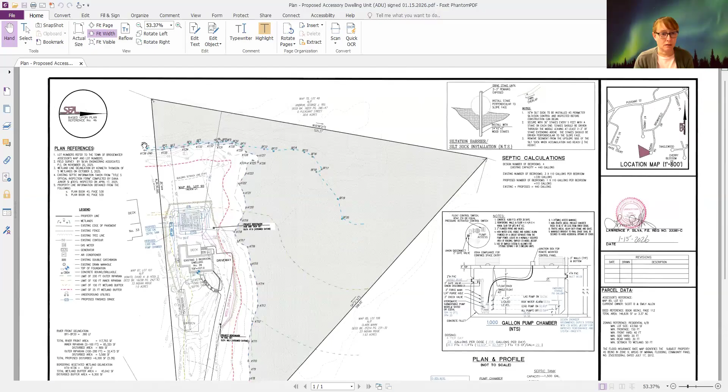This is a continued hearing. We continued so we could do the site visit and review the wetland line. I met with Marilyn and Mr. Levesque, Dan, over at 29 Indian Ridge. We parked, walked the wetland line, the bordering vegetated wetland, and walked all the way to the bank. We identified every flag along the back of the house lot, pointed out the area where the house will be located outside the 100-foot riparian, and showed where the septic would go, in a lawn area. That was most of what we talked about while there.

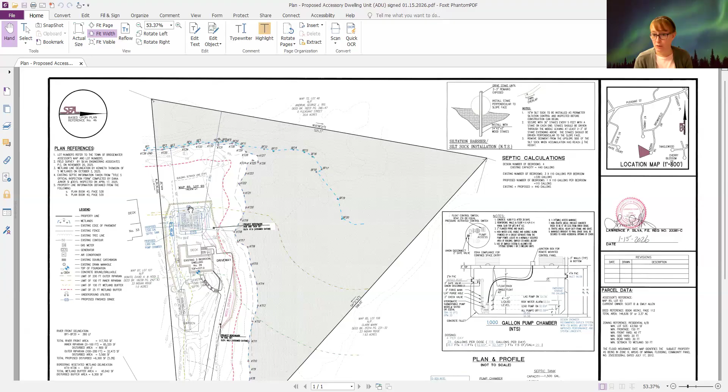I can zoom in. Thank you, Rebecca. Yes, we were out there, and this was one of my first walks with Dan, so I had no issues. All the flags were identifiable. It's well within the setback, it's not in the 25-foot. Thank you, Marilyn. I had no issues with this filing.

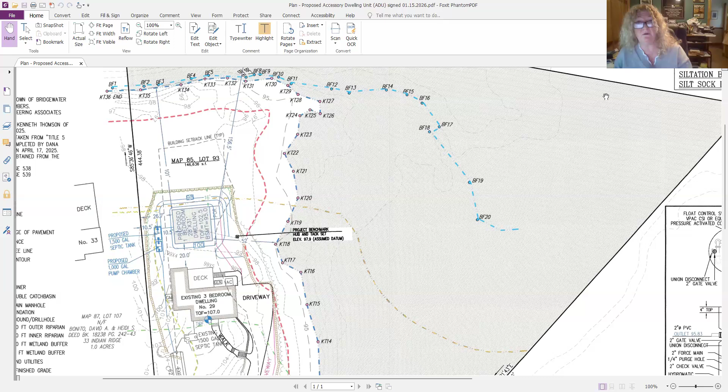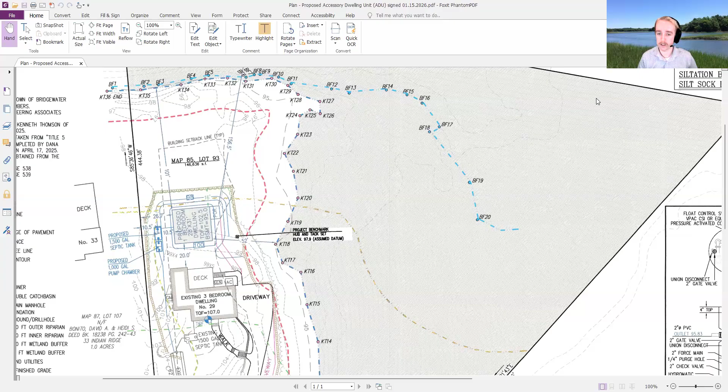Dan, would you like to weigh in on your walk out there? Yeah, I would just agree with you. We went out and were able to identify all of the flags. Everything looked great, and the area we found for the proposed site looked great, and we confirmed with the property owners that abutters have been notified and are okay with the work. There was just a slight thing in the driveway, but it's such a small driveway, it's a grass area, they drive up anyway. So again, I had completely no issues with this. I was satisfied with the line.

Bob, anything from your end on this before I hand it to the rest of the commission? I have nothing. I have nothing on any of these applications, Marilyn. Well, that will make my job easier.

Thank you. All right, let's go right down the line. Laurie? The only thing I was going to suggest is no further clearing in the 100-foot inner riparian. The house is far enough away, but I've seen people clear right up to the riverfront, and I just want to make sure that doesn't happen in this case. If you agree with me, great, if not, that's fine too. No, I think that's perfectly fair. We're going to do a little pruning on one of the trees close to the house. That's perfectly acceptable, it's within the 10. Yeah, and definitely no clearing out back. We can certainly special condition that, but everything is right up on the lawn, so I don't have an issue with that.

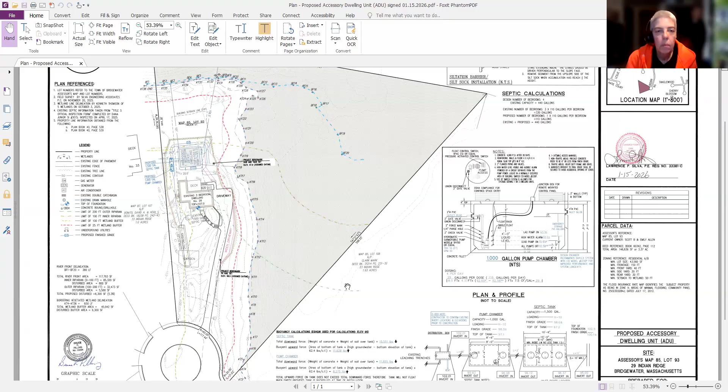I'll go to the next commissioner, Eileen please. Yeah, I'm fine with it. I agree with Laurie, though, no clearing in the back by the waterfront or on the side either. Anything further, Eileen? Nope. Okay, Deb? No, I agree with both Eileen and Laurie, and I'm good with everything else. I think we're all agreeing, no further clearing. Did I miss anybody? Eileen, Deb, Laurie, myself.

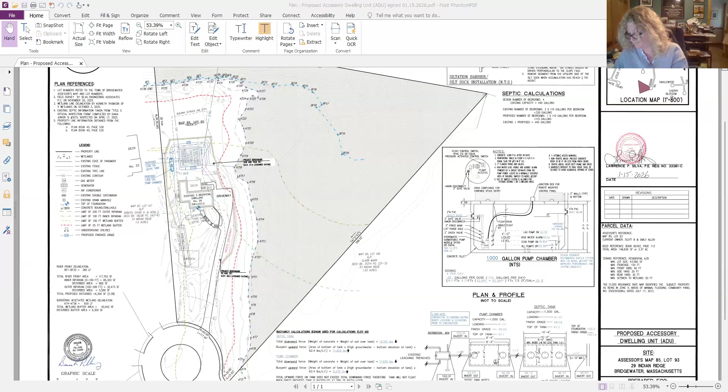All right, Dan, anything further to add before I open it up to the public? No, nothing further to add. Okay, at this time, if anybody, an abutter or anyone in the audience, would like to make a statement or has a question on the notice of intent, this is 29 Indian Ridge, map 85, lot 93. You can raise your hand via chat and Bob will let us know. If you are going to speak, please state your full name and address for the record. Let me see if there are any hands.

I am not seeing any, Madam Chair.

Okay, seeing no questions, then Chair would entertain a motion, please, to close the notice of intent hearing on 29 Indian Ridge, map 85, lot 93.

I'll make a motion. I'll second that. All right, so we have a motion by Deb, a second by Laurie. Any further discussion?

Okay, roll call vote for closure. Deb, Yes. Eileen, Aye. Laurie, Aye. And myself as an aye.

So we are officially closed on 29 Indian Ridge. Chair would at this time entertain a motion to approve 29 Indian Ridge notice of intent with special condition of no further clearing.

I'll make a motion. Okay, I'll second it. That was Laurie and second by Deb. Correct. Any further discussion?

Okay, hearing none. I think we captured it with the clearing. Roll call vote. Laurie, Aye. Eileen, Aye. Deb, Aye. And myself as an aye.

So thank you. We are officially closed and approved on 29 Indian Ridge, map 85, lot 93. Thank you very much. All right, you're welcome.

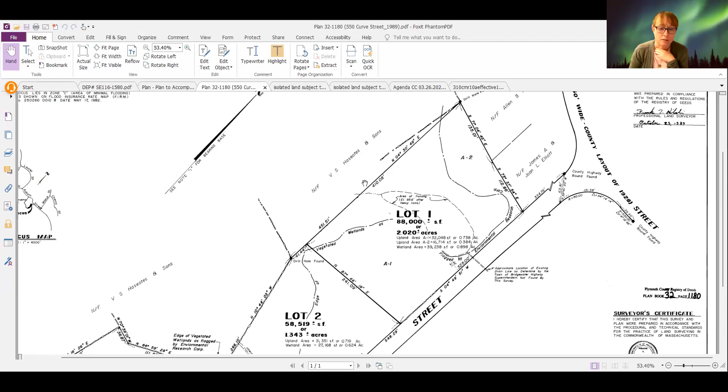And we're looking to put another house right over here on the other side of this area of ponding. Now, this is an area of ponding. You can see that street drainage does kind of flow into this area, and I have more visual aids to talk about this. So we had Ken flag the wetlands in June, I think it was June 2025.

And so we flagged - Rebecca, could you just mention Ken's full name, please? I'm sorry, Ken Thomson of 5 Wetlands flagged the botanist. He flagged the wetlands.

And we went out and located it via survey. And at the same time, when Ken was there, he noticed this ponded area and he had us take volume measurements while we were there. So we'll get into that in a little bit.

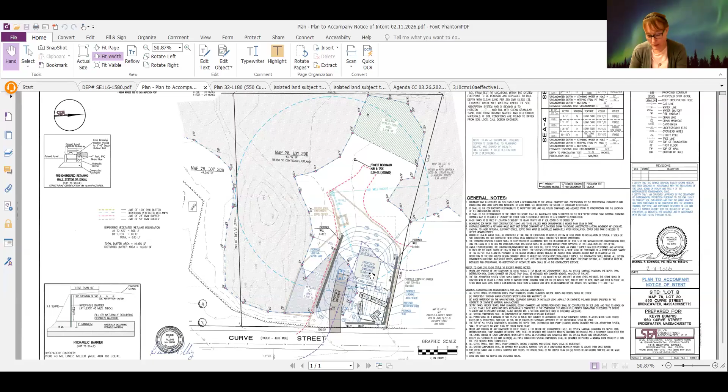So there's this wet area sitting on what would be the left side of this proposed new home. Knowing that and hoping that we can have the family stay together on the same 2-acre piece of land, we tried to estimate what would be the most logical place to squeeze in a tiny little home. It's really no bigger than some people's garages these days.

We completed some perk tests and we managed to get some soils that would be conducive to septic. And so we're coming before you with the hopes that we would be able to fill this 3,000 square foot area. The threshold is 5, so we're under the threshold allowed. This 3,000 square foot area to squeeze this tiny house in and a septic and a well so that we're not using resources from the town.

In return, we would replicate our wetlands back in this area. It's near the ditch. It's probably a more appropriate area for the wetlands anyway.

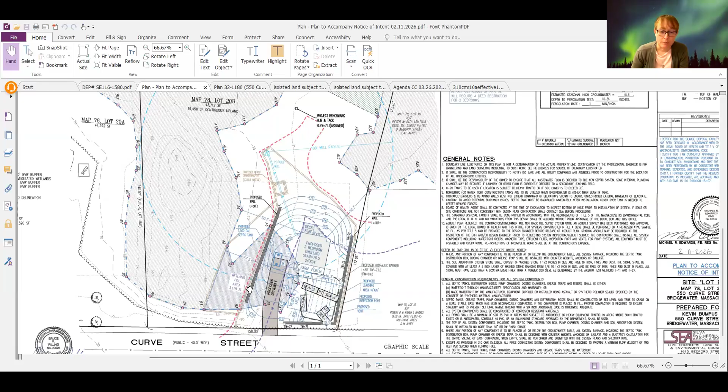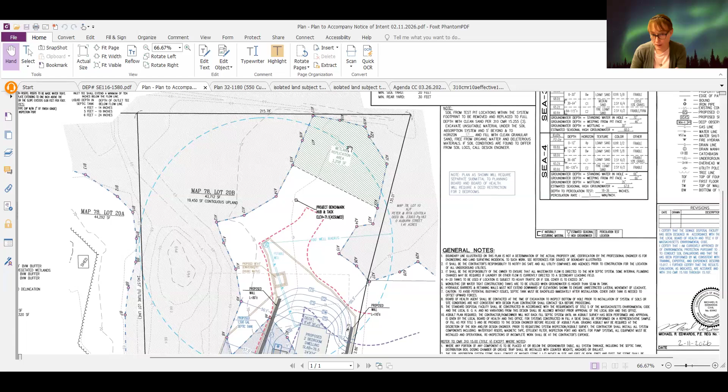When we tried to walk the site, I didn't have enough notice to have it staked, so we do need to go back. While we were there, we did observe via audio that it was a potential vernal pool. So what I'm hoping we can get out of this is to walk the site, flag the areas, do some replication and filling, and make sure it's not viable habitat. And if it is, we need to look at provisions for replicating the viable habitat in suitable areas, preferably where we're going to replicate.

As part of the stormwater, we did have erosion control. We do have a dewatering pit because of the well and everything else going on. Let me check my notes, making sure I got them all.

I'd like to hear from the commission and their thoughts on this. All right, I'm gonna fan it out quickly. I'm just trying to get Dan familiar with the area, getting him out there. It definitely needs to be staked and flagged. One of the biggest things was when we got out of the vehicle at the big pond, we could hear what we call vernal talk. Dan, I'll let you weigh in, and then I want to hear what the commissioners have to say too. Go ahead, Dan, tell us what you saw.

Sure. Upon arrival, it definitely had the vernal appearance first, and we heard what sounded like potentially chorusing wood frogs, which is indicative of a vernal pool. Of course, there are more factors that go into the true classification of a verified vernal pool. I noted just yesterday on Mass Mapper that the site does have a potential vernal pool marking in that general area, so the state's already aware of it. But I agree that getting it further staked and flagged, and then further investigated to determine the actual status of the pooling area, would be important.

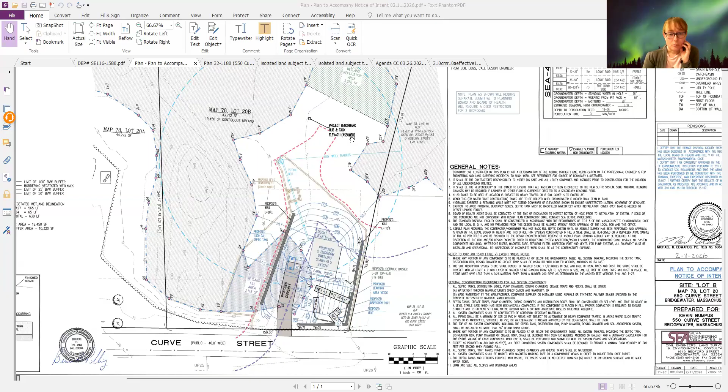Rebecca: Yeah, okay, no, it is not a 2-to-1. The area, we were kind of hoping we didn't have to—I'll be honest—because DEP only requires a 1-to-1. So we can revise this to demonstrate a 2-to-1. What I'd like to point out as well, I know I may have made it seem otherwise, but this is the area of ponding and vernal pool, and I know the habitat ventures out 100 feet. But we did do the volume calcs as required by your bylaws, which say a vernal pool holds a quarter acre-foot and all of that. Since you haven't had it, I didn't want to get into it, but I want to be able to submit it to the commission as we progress along this process.

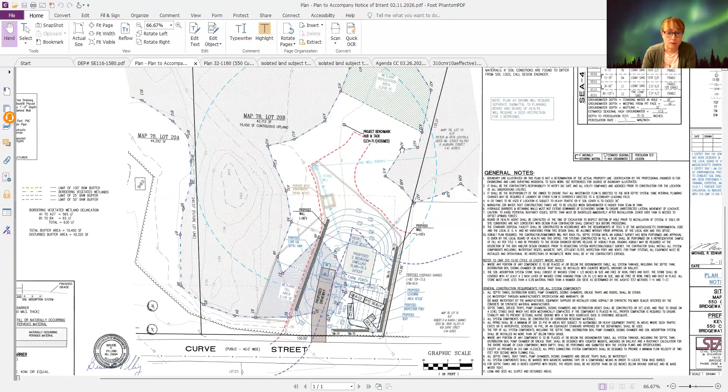It wouldn't be the vernal pool that we're disturbing, it would just be the habitat area outside of it, just for clarification. If there is viable habitat of anything important in here, which we want to investigate and look at before proceeding, we're not going to touch the actual body of water. It does have an outlet, and it actually drains to the ditches out in the back here. So the actual pond isn't all this gray area—the gray area makes it look out of control, but it's actually a lot smaller once you do the volume. So I want to submit it so you can all look at it at the same time. The 2-to-1, again, I was hoping we could still fit it and still give you your 25-foot buffer. So I'm okay if that is a condition you'd like to see.

I do want to point out that a lot of this wetland area has expanded due to inadvertent discharges from some pumps on neighbors' properties. It's really impacted how this section has been growing over time. There is a discharge coming in—just putting that out there because it affects how the wetlands will grow.

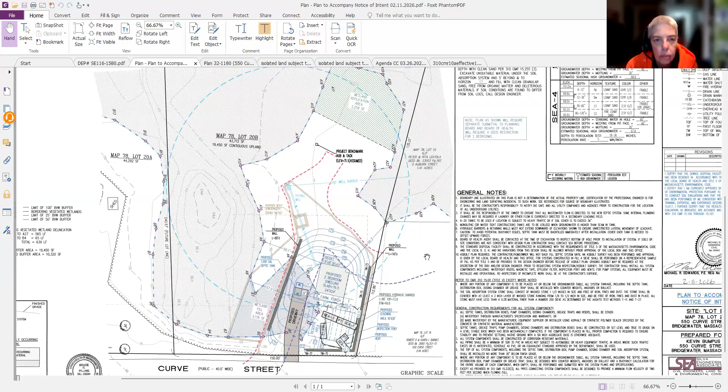Same thing, definitely want to get that certified, and definitely don't want the habitat disturbed. Other than that, I don't have much. I think it would be better at 2 to 1, but I'm not brokenhearted if it's a little smaller. The habitat's the most important part to me in the certification.

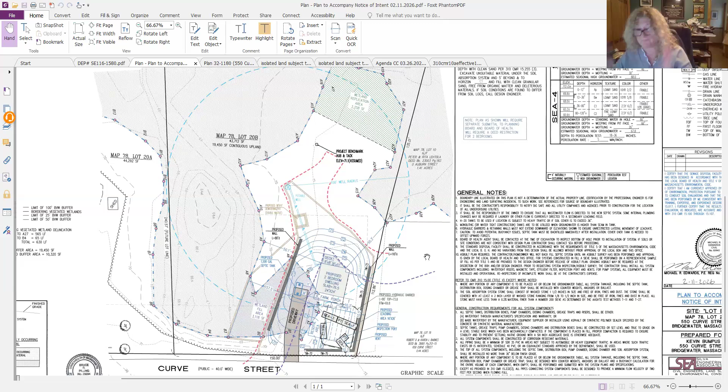I like the flexibility with doing the line at 2 to 1. Again, that vernal pool has to be done, and it's the perfect time now. We're in the season. So, thoughts on that, guys? I agree. I agree too.

All right, Eileen? Yeah, I think that you're probably going to need a third party review.

Given the size of the pool and the rest, I'll always say when I'm not comfortable making a judgment or a call like that, if I'm not comfortable, somebody else is, but I'm not comfortable.

So I think we can get it staked. Rebecca, would the applicant be in agreement to a third party review on behalf of the client? We're just looking at the vernal pool, the wetlands, we're not— Oh, I understand completely. We have no problem if we can solicit three quotes and review them before choosing.

That would be fabulous. Dan will have the list in the office. There are three approved parties. Again, we're not looking for a technical review, so they have the three they can get quotes from, and once they do, they can submit it to us. So it's for the applicant to get a price shop on that.

Perfect. Any other comments before I open this up to the abutters and the public? The only thing I will say is I will stress that this is the time of the season, let's get that third party right in.

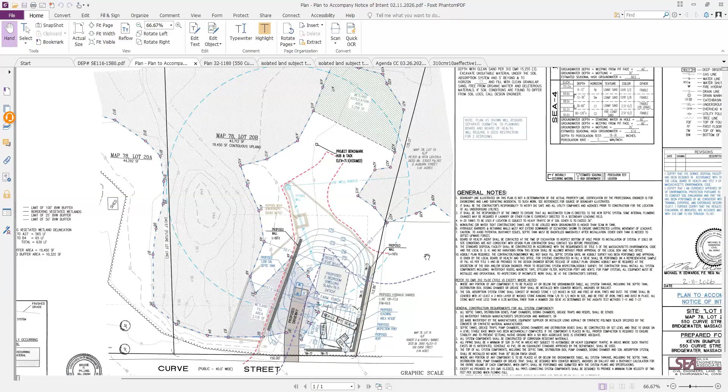Yeah, so in all sense, Rebecca, do you know honestly what you would think to contract somebody and get them out there? Are you looking within the 4 weeks? I mean, it's the right time to do it. I wish to continue for 2 weeks and hope that we can find somebody, and just ask for continuation.

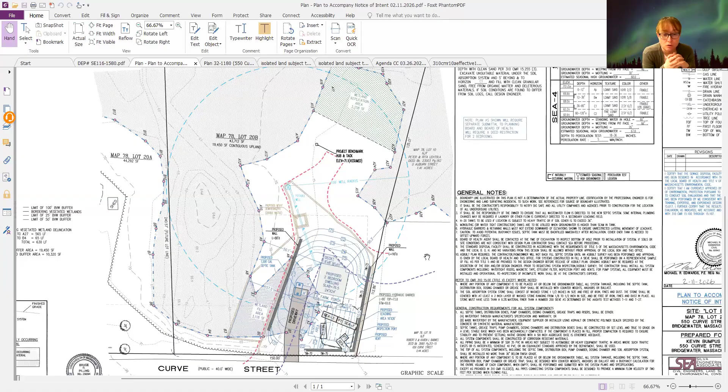So if I can get a list, it is the busy season, so hopefully the three companies understand and can move forward. Yep, I'm all for moving forward and putting the right eyes on it. So we'll get back to doing the...

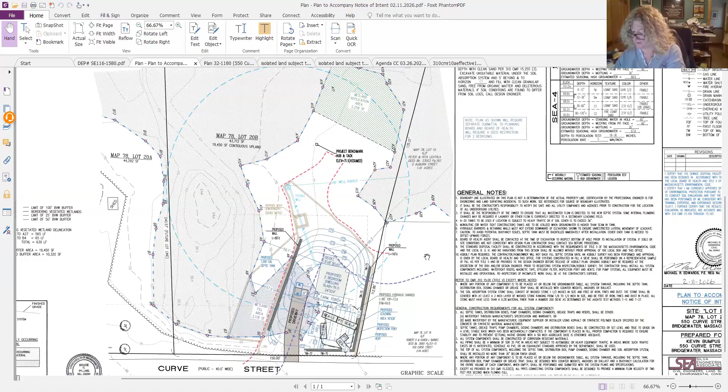Members of the public, but right now anybody in the public have a question or concern on this filing on 550 Curve Street, map 78, lot 20B? So what we're doing right now is getting another set of eyes out there, and this will be continued. But if you have something you would like to add to the commission, please feel free. Use the raise your hand feature or send a message in the chat.

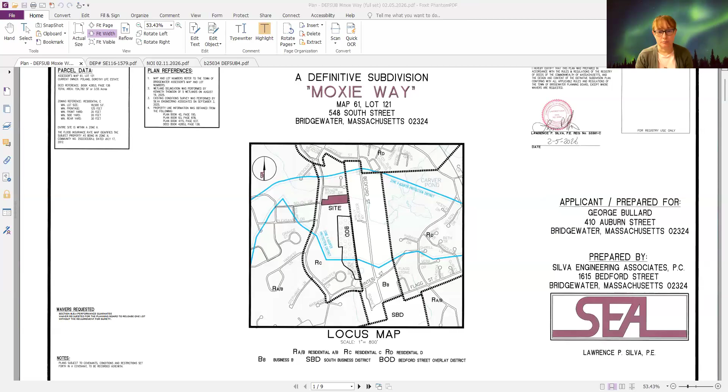We did an existing conditions survey. We have the wetland line flagged by Ken Thompson of 5 Wetlands. He did it in August of 2025. He flagged a series along the ditch. There's a ditch that goes to the north and across to the Mitchell property. He identifies it in his report.

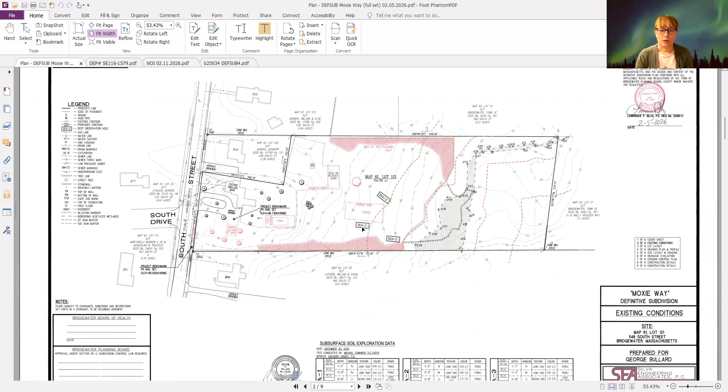We laid out the 100-foot buffer. We have done test pits for drainage, and they were witnessed by the town engineer. We still have to do perc tests for the individual house lots.

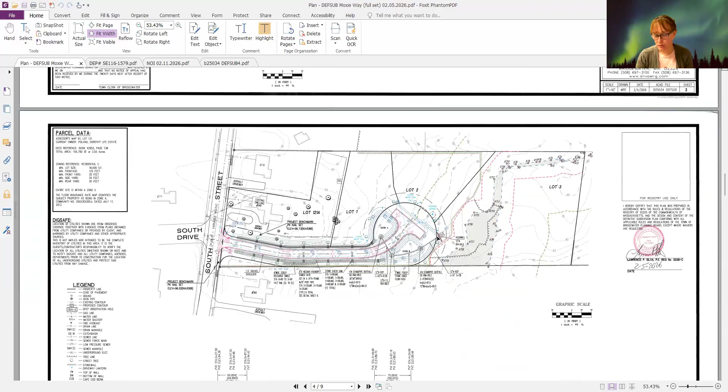If I go through the pages here, we have a narrow 16-foot wide paved road. We have the swales on the side with the stone and the check dams. We have 2 drainage basins. We have an outfall currently shown outside of the right of way in this version. I say that because the town engineer has provided his comment letters, and he has asked that we take this discharge and place it inside of the right of way.

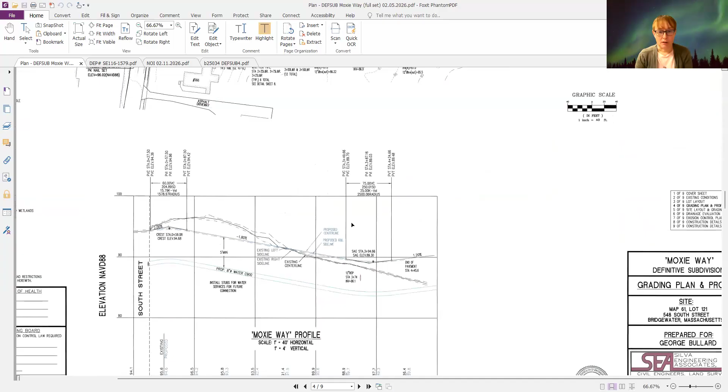So we've made some changes to address the town engineer's comments along the way here. I'm going to keep going, and what we've done here is we've laid out the potential grading and drainage for the lots.

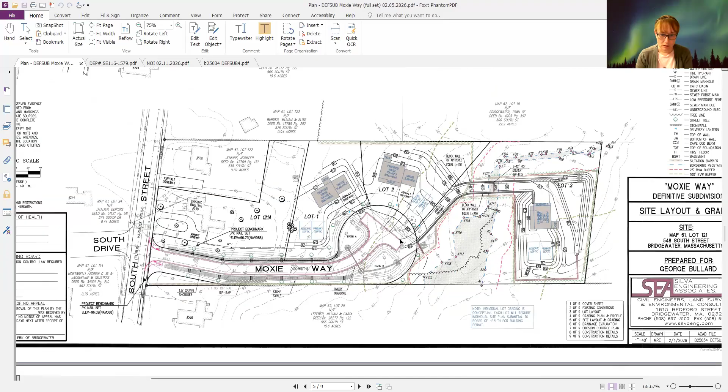It will have to come before you for its own notice of intent. This entire driveway will all be subjected to its own notice of intent. This one is strictly for construction of the roadway in the 100-foot buffer, so just this activity here under the jurisdiction. Again, there's a note.

We did the drainage and met the 10 standards. Even though it's a 4-or-fewer lot, which does not necessarily have to be fully compliant with the 10 standards, we are in a zone 2, which means we do have to comply fully with the 10 standards.

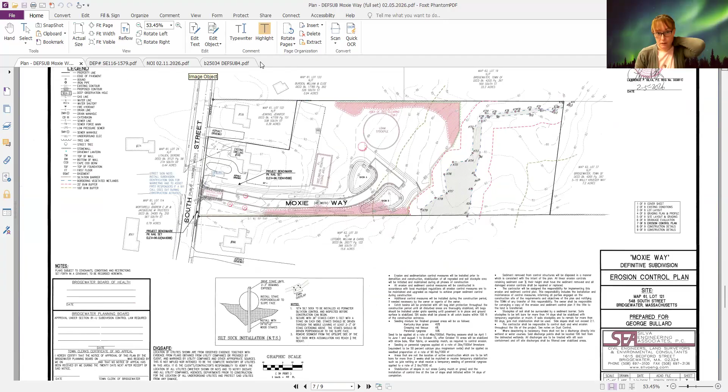I wanted to show you some of the other changes, just so you're aware. The town engineer asked for the change. This hasn't been submitted to them yet. Their next meeting is April 15th, and they will see this on that plan. It's actually better for you, because now we are a little bit further from the wetlands with our discharge.

Did I hit all my parts? Did I hit all the points? One moment. So, any questions from the commission?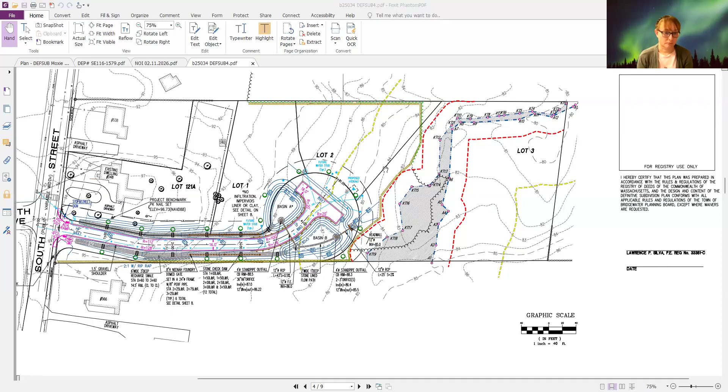Thanks, Rebecca. So, obviously, we're gonna need to get out there. I'm mistaken by the corner. I'm thinking my thing is following. You're all squinty, thank you. I'm using my thing, thinking you guys are seeing it all.

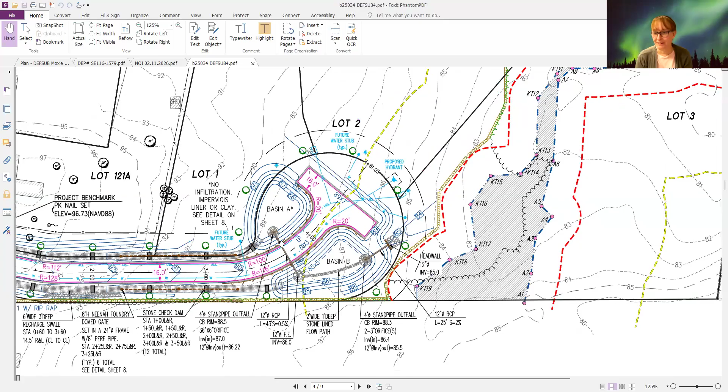If we could stake out that driveway corners by the wetland line. It's busy, I'll stop passing it on, Laurie. The first thing I noticed, I know Rebecca said you didn't want to talk about lot 3, but...

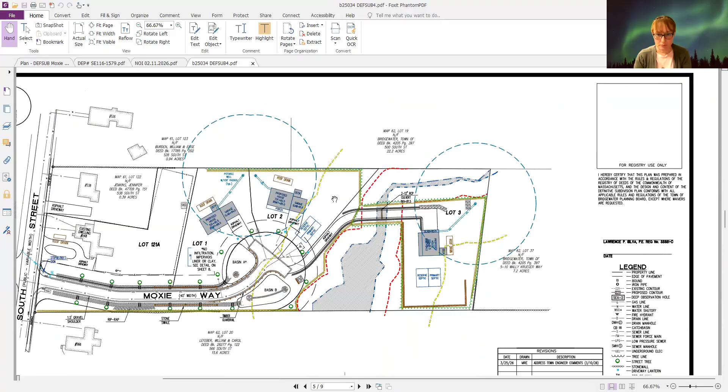You've got 2 wetland crossings to access that back lot. Well, hang on, let me count with you because I might have missed one, but I saw 2. There's only one. I saw right here. 2? You saw 2? What crossings did you see? We're crossing the ditch right here.

Oh, you're crossing the ditch there. Okay, and this is the wetlands up here, correct? The blue dashed line right here is the wetland. Okay, the blue is the wetlands. The red is the 25. All right, so we're crossing that. So we are crossing a wetland to access it. That was my main point.

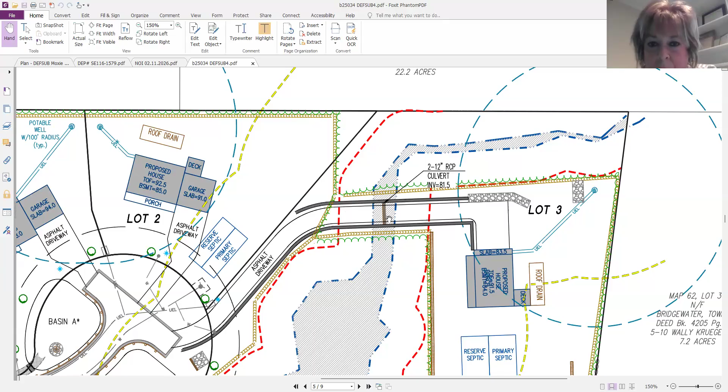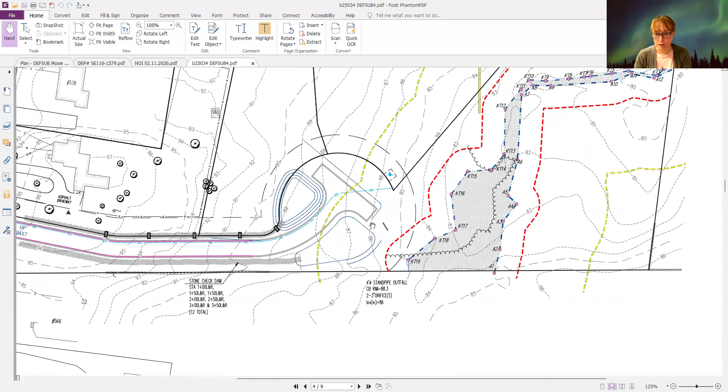Correct, yes. This will all have to be under its separate notice of intent so that we can review everything appropriately. That's why I was hovering on this one, because the request right now for this notice includes just this. We will come back to you before we do anything on lot 2 or lot 3.

Okay. I'm not a fan of wetland crossings. I'm just not. This lot seems to be like you're trying to fit a lot in on it. But like I said, we can speak to lot 3 when it comes back, but I don't like crossing a wetland to access a property. That's my opinion. We'll see what the commission has to say about it.

Sorry, I muted because I was making a lot of noise with the big plan I have here. All set, Laurie? I'm all set. Okay, again, I said the same thing, busy. So let me just go to Deb.

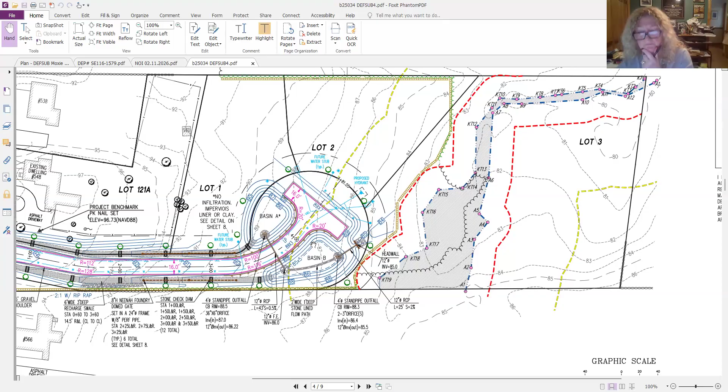So this notice of intent is just for the driveway, is what we're saying? Just the 16-foot wide roadway, hammerhead, the grading and the drainage for now. That also does include a hydrant, fire suppression, water for that, and the vegetation, the trees along for a subdivision. It includes the drainage required for Bridgewater for a 4-or-fewer lot, which is the stone ditches. Nothing to do with the development of lot 3 and nothing to do with the development of lot 1.

I'm sorry, 2 and 3. Oh, I'm looking at 1. So, yeah, I have nothing then if it's just for the roadway right now.

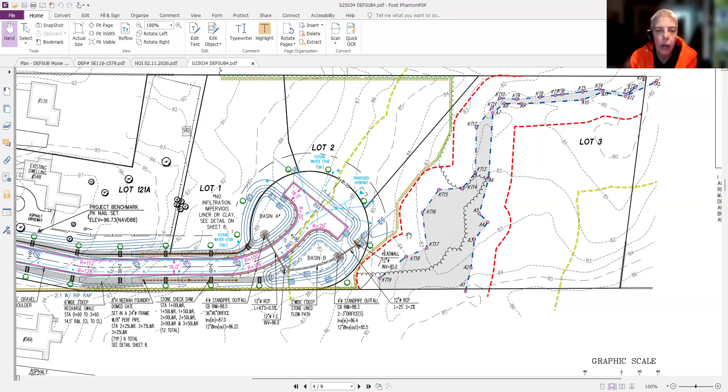Thank you, Deb. Eileen, please. The roadway is only 16 feet wide. Is there a reason for that? It's allowed as a reduced development roadway in Bridgewater. Okay, 16 feet, huh? Yeah, with 1.5-foot shoulders on either side and the stone swales on the side.

Just a little bit wider than the driveway. Well, it's only serving 3 homes. I'm concerned about the fire department and all that turning around, hence the turnaround, and the ambulance. That's a good point, and two-way traffic. Yeah, no, we've done a few of these smaller ones for a few lots and it's 16-foot wide. Okay, well, that was my only question, really.

All right, did I hit all the members?

Eileen, please stake it out. I need to get out there on foot. Eileen, if you want to join me that day, I'll give you a heads up. Okay, just let us know when Rebecca has staked it and we can get out and go from there. Yep, will do.

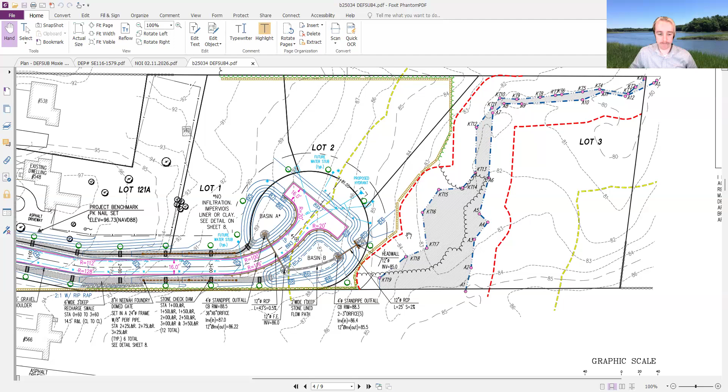Is the commission all set? Any other comments from you, Dan, at this point? No, I have no further comments. Okay, so I have one.

Eileen: Rebecca, can you maybe supply us with a couple of the roads that look similar, so I could visually look at them and see one that's already done? Please keep muted if you're not on the commission. Rebecca: Oh, absolutely, I'll bring some examples.

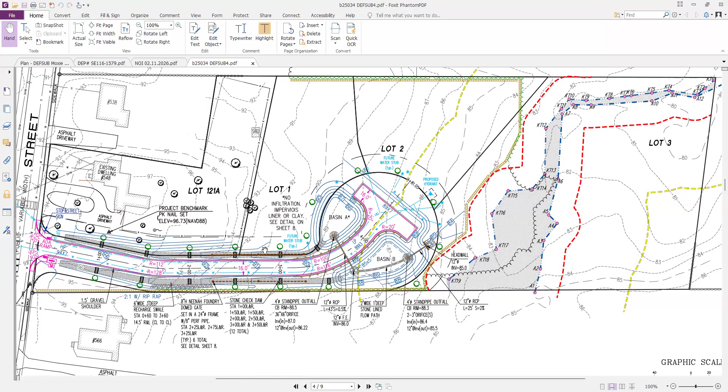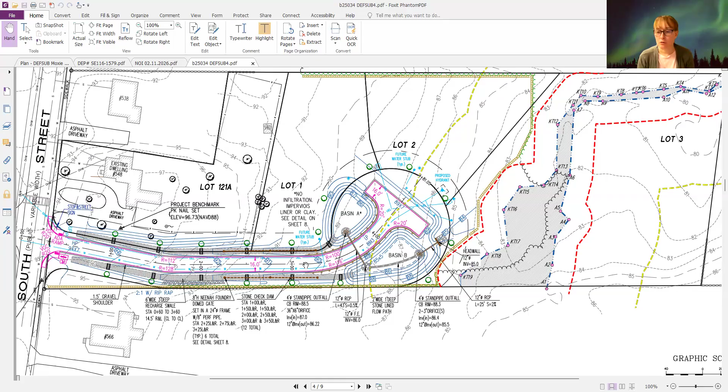There's a new one on Winter Street, Hamden Ave, quite the hill. I can send you a few addresses. You bet. Thank you.

All right, sounds good. So commission members are all set then? Yep. All right, I'm going to open this up to the public for any comments, questions, or concerns on this filing for 548 South Street, map 61, lot 121. Please direct all questions to myself, the chair. I am going to note for the public record that the commission received a letter from William and Elsie Burden prior to the meeting. Please note we have that in our possession and it will go into the record. I did get to read it, not sure if the other commissioners did, but we have it.

It's noted, thank you. At this point, Bob, please let me know if there's anybody with their hand up. If you'd like to speak, use the raise your hand feature or put a message in the chat and we'll run through the list. I believe there is a Bill Burden who is raising their hand in real life, not virtual.

All right, we'll let you- oh, you're muted. Mr. Bill Burden, can you unmute please? And just for the record, state your name and address. Hi, this is Bill and Elise Burden at 526 South Street. Thank you, go ahead.

Well, first of all, we have- all of these lots are long, like the same as Mrs. Poulin's house. We're very concerned about the disruption of the nature of our properties, but also we sit on an aquifer in this area. We have a lot of wildlife. I get deer crossing, the school is right next door, so their habitat has shrunk.

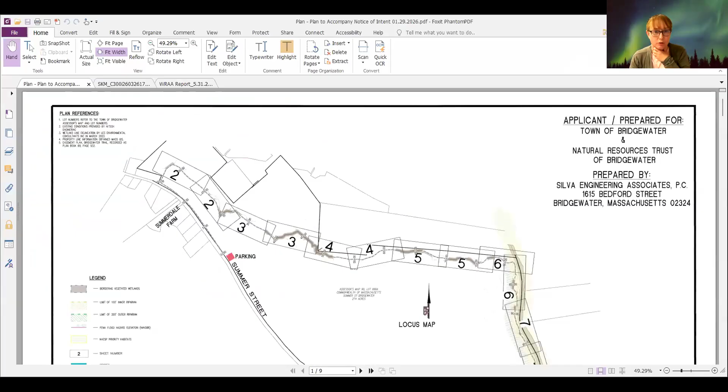Okay, never mind. So what you have before you, I hope, is the plan. You see the plan on the screen? Yes, okay. So we are on the Commonwealth of Mass, the big open fields. This is the Taunton River. You gotta turn your view a little bit. This is the Taunton River. And this is Summer Street.

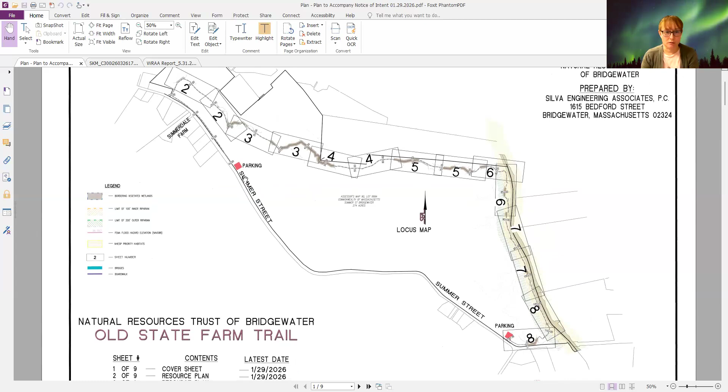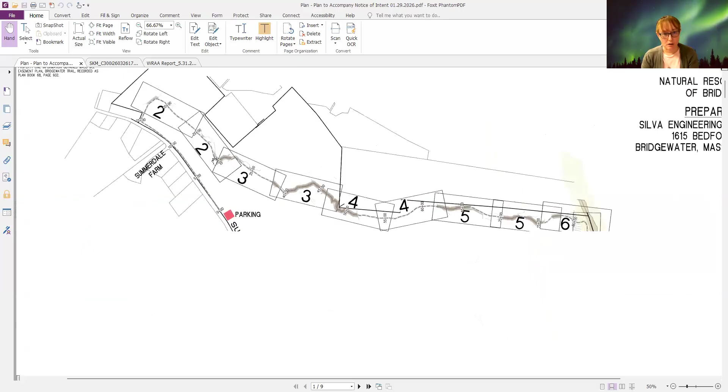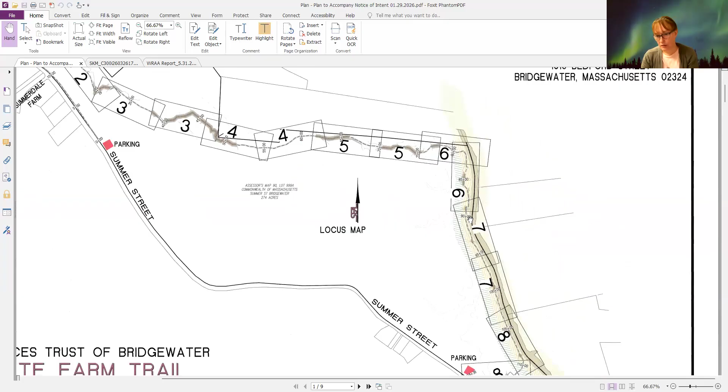I believe you are already aware of where the parking lots were kind of proposed and constructed out there. So we have in front of you a proposed trail. We have one parking lot, the north one, and it would go north all along through these gray splotches, which are wetland areas. So the overview, it's a nice long trail, and all in here is the riverfront, the habitat, the areas that we really want to look at and be part of nature over in here, and then a little bit more in here.

The wetlands were flagged by LEC in 2023. There's a lot of them. I know there was a bit of a site walk, I wasn't able to attend. I know this was the handout given for how some of these piers will be constructed and some of these walkways.

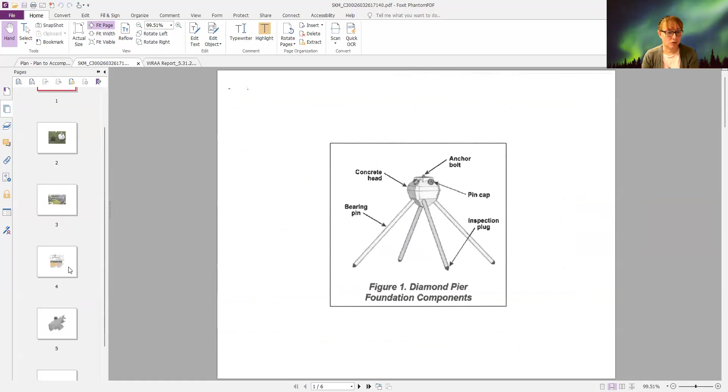So some of the walkways will be what you see before you. If Dick, Mr. O'Brien, is on, he can talk more to the construction of these bits and bobs that he's got here. But the main point of these is that it's very quiet, non-invasive. You put this little bulb in the ground, and then you spread these spears into the ground, and it supports the whole thing with little impact.

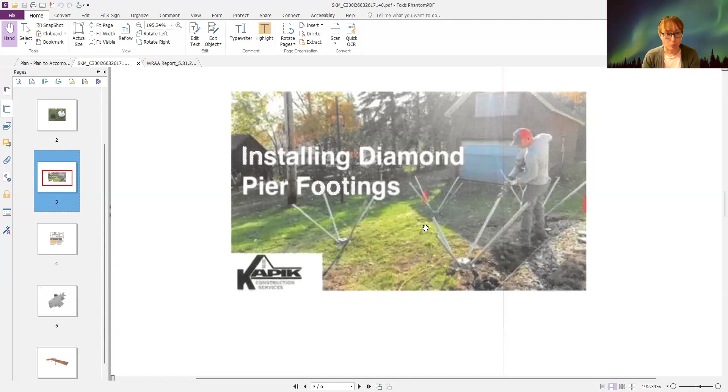You are not digging anything more than that little, probably 2x2, and then you're drilling these piers into the ground at an angle so the soils can help keep the decking up off the ground. So when it comes to impacts, it's very, very little, because once these are in, they just build the planking, and the hardware free floats above it.

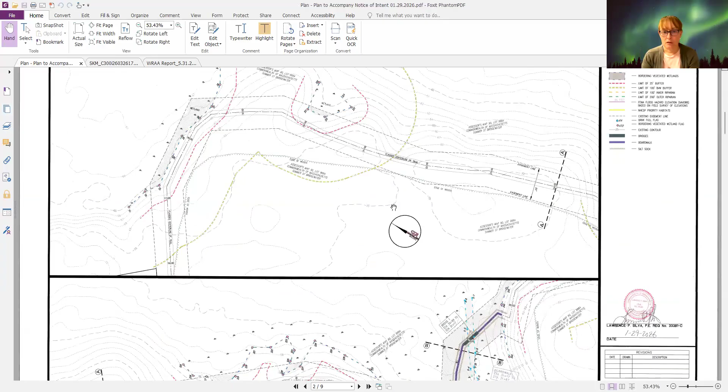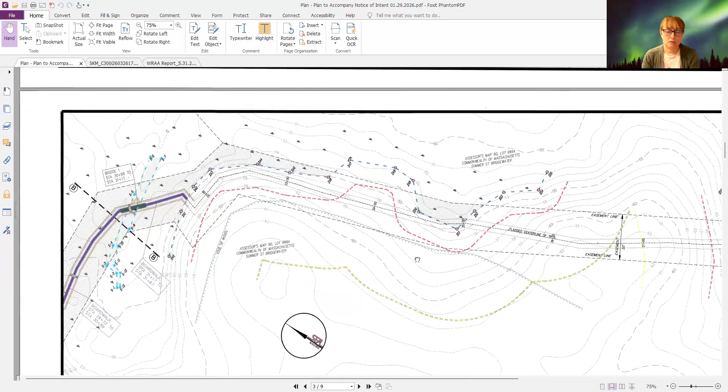I know the DEP number came in. It did have comments, stream crossings, calculations that we need to talk over. Again, this is another one of those where we probably want to look at, for instance, we have a little bit of a bridge right here. We would want to see what it looks like in each area. Again, we're in a habitat in some of these places, so we want to look at it a little bit further. We have 8 bridges throughout the whole length.

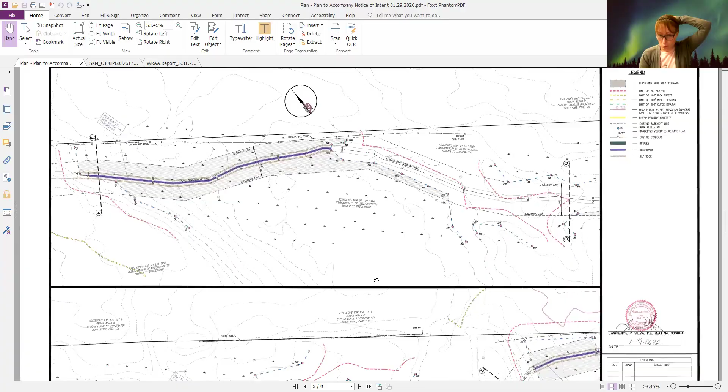Again, we have intermittent streams flagged. We have the Taunton River flagged. There's a lot going on. I recommend we kind of go out if we want to. I'm not sure where that site walk went over, but I'm willing to listen to what the commission wants to discuss. I'm going to zip down to the construction, if it helps.

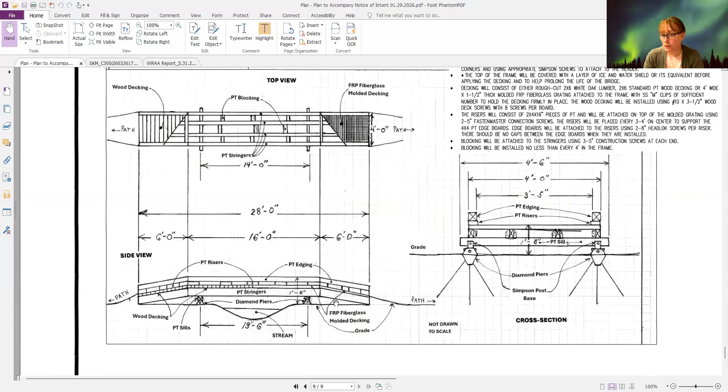So the wood decking sits on top. We've got these cute little diamond piers, and the decking really just floats above what's already there. We'll have the ramp up, so that you're not stumbling. So you're gonna have a little bit of grade change right adjacent to the path. But you can see here, even the planking will adjust accordingly to make it a smooth transition.

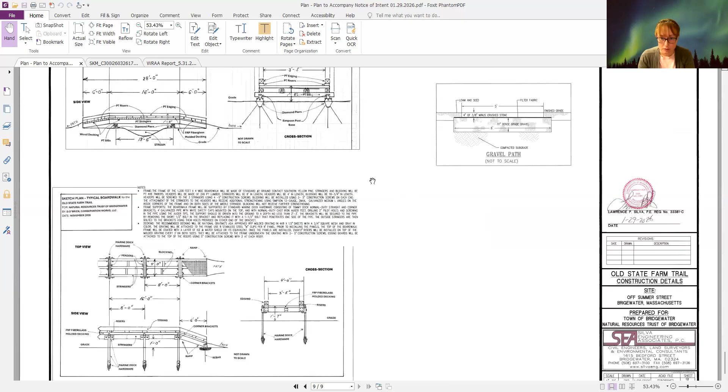And then we have the boardwalk, which is very similar in nature. The hardware is a little bit different, the boardwalk compared to the bridge. But the boardwalk will float above the existing grade as well. And a gravel path. So, I can entertain questions from the commission.

All right, thank you, Rebecca. I'll start and then I'll have Dan. We did go out there just as a very informal visit, I'm familiar with that area. Just took a look. It's a long trail. These trails, I think, are great for people.

I love the fact that it's going to be handicapped accessible, was able to get my mother down to the, all that stuff is great. The equipment looks great. But for me, the bottom line is, this is a long line. There's crossings, and I'll always say, when I'm out of my comfort zone, I'm out of my comfort zone. I definitely want to go back out when it's flagged, but for me, this needs another set of eyes just to make sure with all the crossings and everything, because I am not comfortable making a call on a line that long with that many crossings. But again, I think it's a great thing to have. I'm in support of the project. I just want to make sure we have another set of professional eyes.

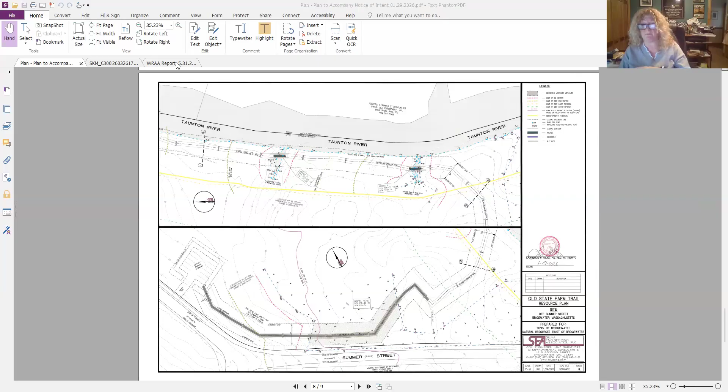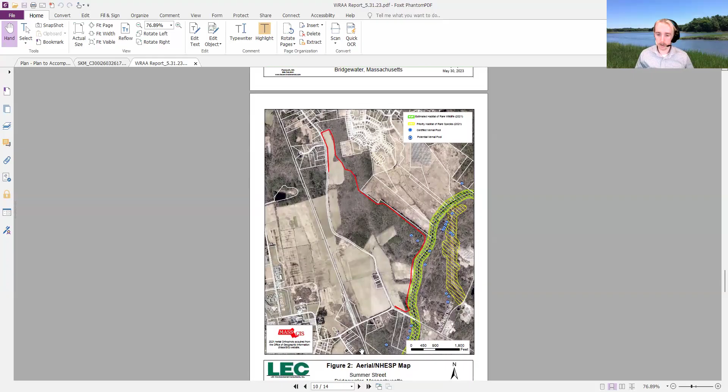No, not really anything outside of just echoing what you said. It's a really long line, so getting a third party out there would be a good idea. But we got out there, saw the beginning of it, and saw some flags flagging the trail line, but not necessarily flagging either wetlands or river boundaries. So once those are out, I'd really like to get back out there and walk the trail and really get more into it.

I agree, I'd like to get back out there too, but I also know where my limits are. So that being said, I'll hand it off to the commission. Laurie? I agree with both what you said and what Dan said. I think you need to take a look at it to see what you're up against.

It sounds like the trails would be absolutely beautiful. I think it's a great idea, but that's a fairly substantial wetland, and you want to make sure it's not coming too close, and also the crossings. I don't like crossings, as you know. But that's all I have to say. We're getting that inclination now. That's all I have to say.

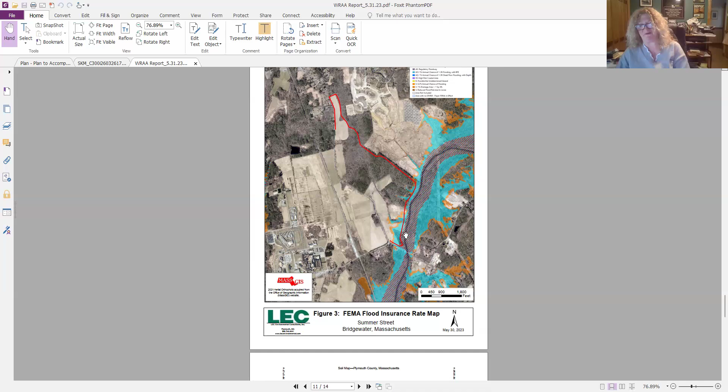Okay, great. Again, I support the project too. Just proper eyes. Who do we got? Debbie, please. No, I agree that we should have a third party looking at it. And I think we're probably gonna have to keep this thing going, we may not have a choice with the crossings.

Just want to make sure they're done right. And I would encourage the board to get out there. Maybe we could even make this a quorum when it's set, but it's a good place to get your eyes out there and do it. So I encourage all of us to get out there on this one. Eileen? Yep, same thing, I agree. We need to get out there and take a look before we make any decisions.

All right, sounds good. With that, I'm going to open it up for anybody in the public or abutters that have any questions or concerns on the notice of intent. Again, this is off Summer Street, Old State Farm Trail, map 90, lot 999A. Applicant is the town of Bridgewater, Justin Casanova Davis with Silver Engineering. So please raise your hand to Bob via chat remote.

Hands. I'm not seeing any, Madam Chair. Okay, all right, with that, let's see.

Chair would then first entertain a motion for a third-party peer review. So can I get a motion for a third-party peer review? I'll make a motion. I'll second it. All right, we have a first and a second. Any further discussion? No, okay. Roll call vote. Deb? Aye. Laurie? Aye. Eileen? Aye. And myself as an aye.